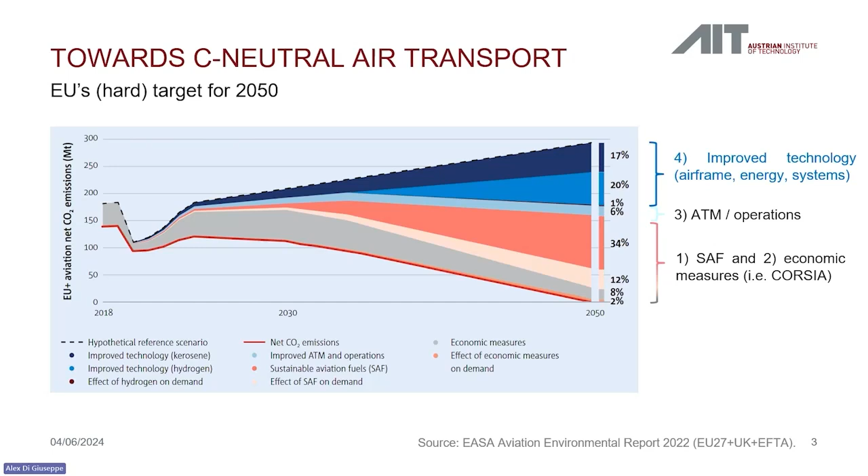What we mostly work on is the remaining part, that is a combination of technologies. So both in terms of airframe, so more efficient, lighter aircraft; energy, so replacing the hydrocarbon fuel with something else; and systems, having more efficient ways of transforming energy within the aircraft.

The EU and the Directorate of Research put forward three strategic thrusts. I'm using their terminology. They developed three platforms on which new aircraft concepts are supposed to be introduced. Actually, 3+1. The short and medium range, that are aircraft for 150 to 200 passengers. If you ever took a Ryanair flight, that's what we're talking about. Hybrid electric regional aircraft, so something smaller that generally accommodates 50 to 100 people, and hydrogen aircraft. Hydrogen aircraft, I will not go into details, but basically involves using liquid hydrogen for very long distance intercontinental flights, like Boeing 777 or Airbus A340, A350.

I came up with this nice graph on where those concepts are located. Here on the x-axis, you can see what is called hybridization of power. So how much electric power you need to move the aircraft. 100% means only electric motors. On the y-axis, you have hybridization for energy. So how much energy does your aircraft carry? That means as you go up, the more battery you carry.

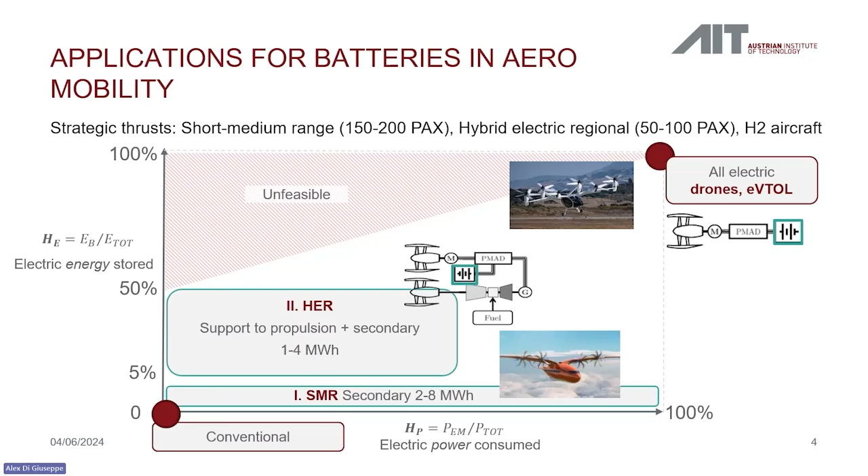The hybrid electric regional aircraft are smaller, so they allow using the energy for support to propulsion. Basically, the battery will be assisting the main propulsion system. And here, smaller size means smaller energy stored. So roughly 1 to 4 megawatt hours, still depending on the size. In the strategic document that you may access, they use the word technobricks. So those are all the technologies that need to be developed in order to make electrified aviation possible.

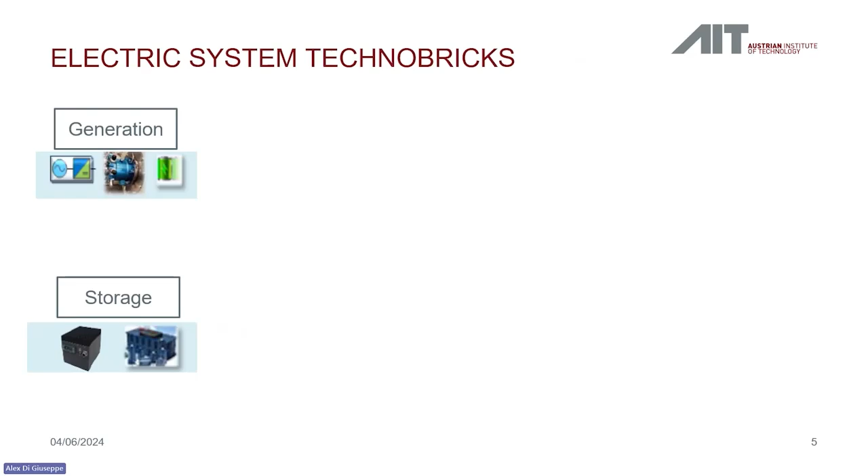Especially referring to the electric system, there are others, of course, that I don't include here. There is the generation and the storage. So generators for more complex systems, fuel cells. We have some speakers here researching fuel cells. So this is a field of application. And of course, batteries for storage.

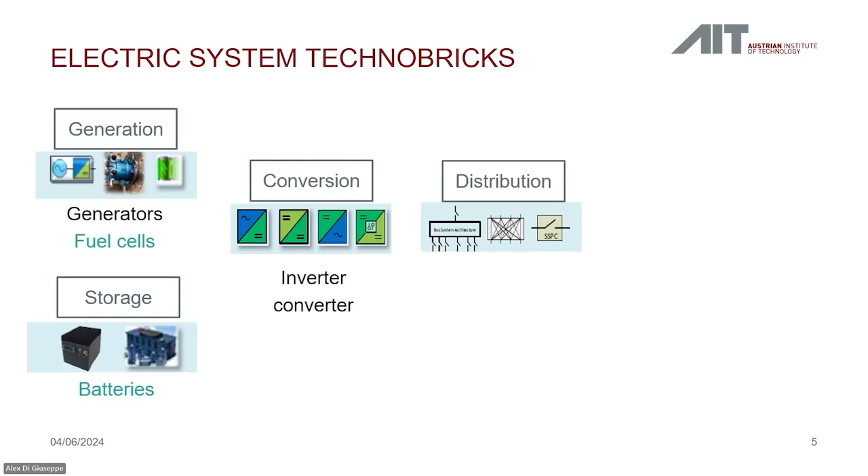Then as we move towards the usage, we have conversion, inverter, converter, distribution, and loads. So APU is basically the starting motor that starts the aircraft. IPS, ice protection system, flap actuators, cabin loads. So whoever wants to watch a movie while flying or wants to charge a mobile, that's a cabin load. And avionics. Currently, we use batteries, that is the main topic we're discussing here, for the last two.

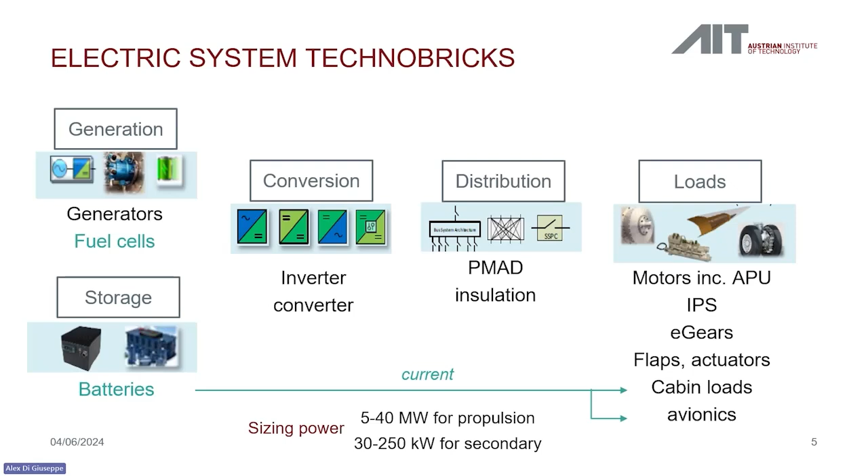Sizing power of this aircraft, just to give you an idea of order of magnitude, is 5 to 40 megawatts for propulsion. Megawatt, 1 megajoule every second. Secondary systems in future aircraft, of course, much smaller, 30 to 250 kilowatts, but still significant compared to today's standards. For energy storage, the clean aviation strategy considers both fuel cells and batteries. They are not mutually exclusive, and cannot be seen separately one from the other because they have different characteristics and they hybridize fairly well.

So fuel cells have the advantage compared to large battery systems of being lighter. Battery systems, if you look at some preliminary calculations, we are talking about batteries that weigh 5,000 kilograms on an aircraft. That means 20–30% of the takeoff weight. They are lighter storage because they rely on hydrogen instead of, say, lithium-ion cells, and cope fairly well with other aircraft subsystems. On the other side, batteries are more efficient, and they have much less problem in terms of thermal management compared to a fuel cell. If you think about that, 50% efficiency of a fuel cell means that the other 50% becomes heat, and you need to dissipate that heat during flight.

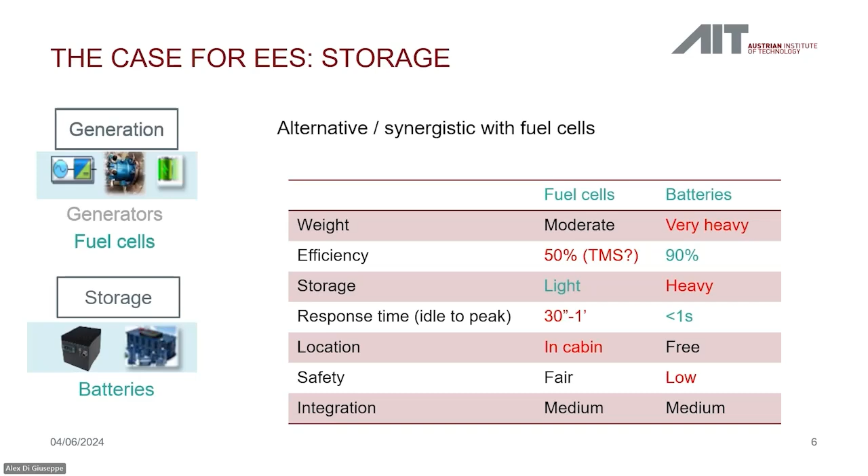And response time: batteries are not supercapacitors, but they are reasonably fast in response, for example, to a sudden power surge required. For example, if there is a missed approach, the aircraft needs to get full power immediately in order not to crash. Fuel cells here are much slower. They need time to build up their power delivery.

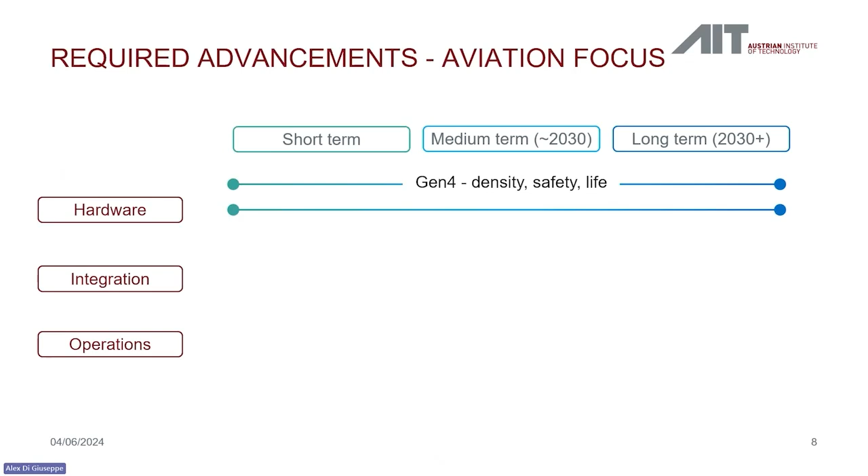So trends for battery research. Okay, this didn't go as intended. This is still a programmatic document that Stefano and Roberto may have contributed to writing, I guess, and identifies short-term, medium-term, and long-term goals. And we have areas related to aviation hardware, integration, and operation where we want to work.

So when it comes to hardware, so basically the cells, we want to have the new generation of battery that we will see later, what we call the generation 4 battery, the solid state, to use a more common word, which promises better energy density, better power density, better safety, and hopefully, unfortunately still not verified, longer lifetime than today's. Lightweight modules and packs, thanks to techniques involving additive manufacturing, for example. And for the long-term perspective, generation 5 cells, so advanced lithium, post-lithium batteries, still with the same target.

When it comes to integration, the advanced integration mostly refers to sensors and the management system of the battery. So you want to know what happens in all your 1,000 battery cells and make sure that all of the cells are behaving properly. And if something happens, that you have a safe way of, for example, excluding that cell. This is a huge step to take in order to get certification, which is extremely hard for batteries.

And since we're talking about certification, one of the things that is particularly challenging is that today there is no standard for certification of electric aircraft. It literally needs to be written, meaning to be invented. Probably some of you in future will be involved with this. And it's a quite active, I don't know if you call it a research field, but anyway, it's a field that still requires strong contribution and will require even more in the next, let's say, 10 to 15 years.

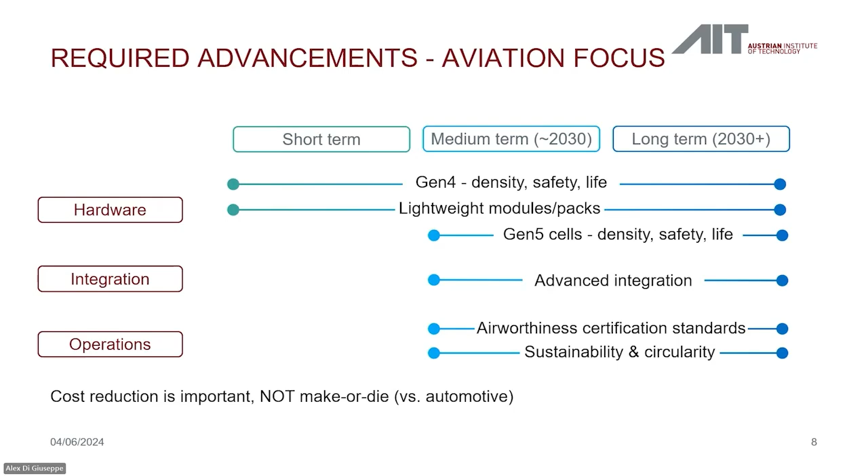cost is a priority. Or if someone is involved or will be involved in marine applications, so batteries for ships, what they want: low cost. After that, low cost. After that, long life. After that, low cost.

There are also some transversal requirements that are set in the policies. So capability of fast charging, I will explain later why. Providing high power and low degradation at the same time, of course, for life. Creating standards for control and interfaces between the battery system and power management and distribution or other aircraft systems. Cross-compatibility, that means that you want to use different kinds of battery without repurposing everything else.

Develop battery swap technology. Batteries for aviation are not going to last 100,000 cycles. Reasonably it will be 5,000 cycles, but this is very optimistic, most likely 2,000-3,000 cycles. So batteries need to be swapped and removed. There is also an idea of swapping batteries in between one flight and the other. This requires developing connection mechanics, so the physical way of removing the battery, the devices, the operations,

electronics and battery management systems for different chemistries, and developing all the infrastructure and logistics of battery swap, including second life application. For example, a battery that is considered no longer useful for aerospace may go into stationary storage, grid storage, or may be used for naval applications.

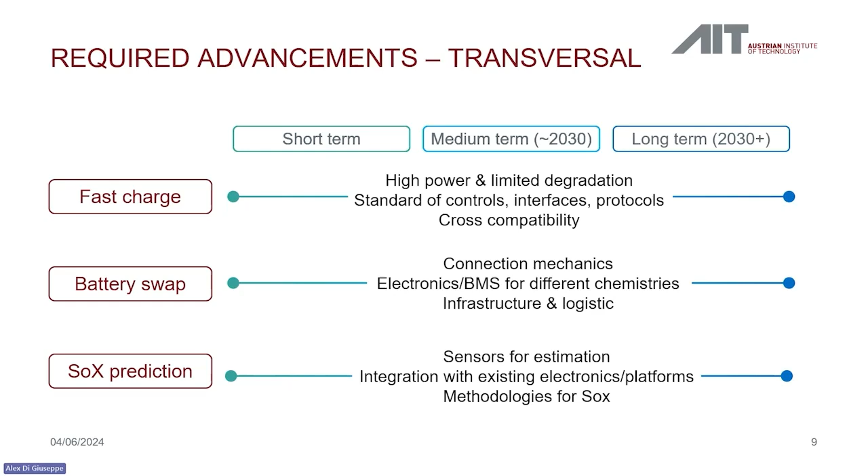And then SOX, which a few years ago was state of health, and now is state of everything: state of health, state of functionality, everything involving the knowledge of the properties of a battery. So what is the useful remaining life, if the battery degraded, if there is a leakage of chemical elements, if there is dendrite formation that may create safety issues, and so on.

So where are we now? Batteries, as I said before, basically function as support of secondary systems. Auxiliary power unit starts. The biggest battery today in aviation is roughly 1 megavolt ampere, 1 megawatt, and it powers the APU of the Boeing 787, the big one.

Batteries are efficient today, at least compared to other aircraft systems. 90% for a battery, I think everyone can agree on that. The best gas turbine makes 40% maybe, when in good condition. Other systems even less. Diesel car, 35%. Flexibility, because they can be easily scaled. What today is not acceptable for aerospace is the weight and the safety.

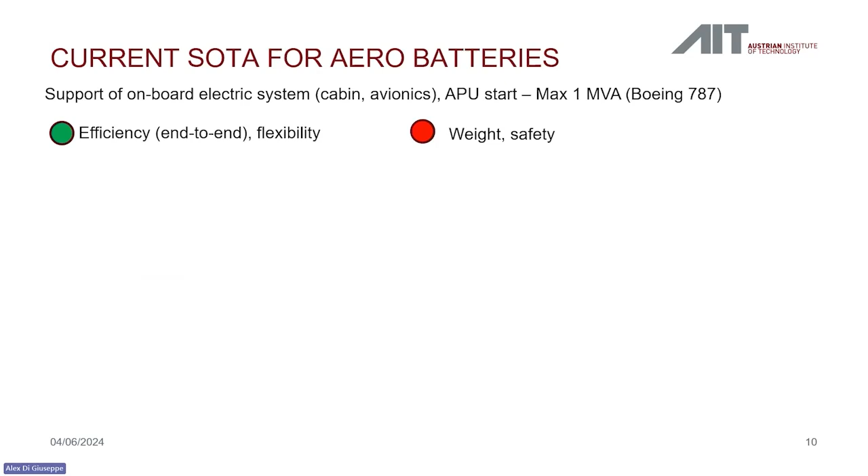We have liquid electrolytes, which are flammable, and that's a huge risk. If you remember, a few years ago, there was a problem with the batteries of some electronic devices that caught fire in aircraft. Now just imagine if it's a battery that is 3,000 times bigger that catches fire, see what happens. And integration with other aircraft systems.

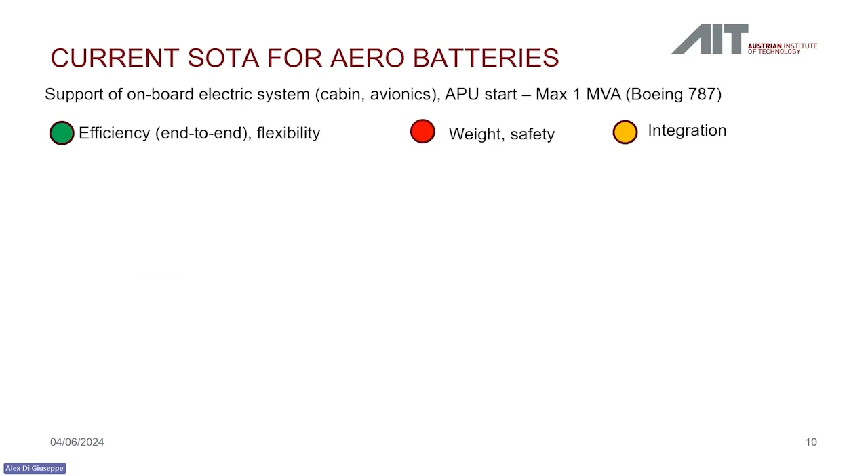The current generation, for those who are not familiar with this, is labeled generation 2B: batteries whose cells have NMC as a cathode and a silicon-carbon anode, basically a carbon anode with a very small content of silicon, and liquid electrolyte. Those cells are the standard for the automotive industry, and their development has been driven by the automotive industry. For example, take Tesla or the Chinese car manufacturers that are launching into the market now. They are here.

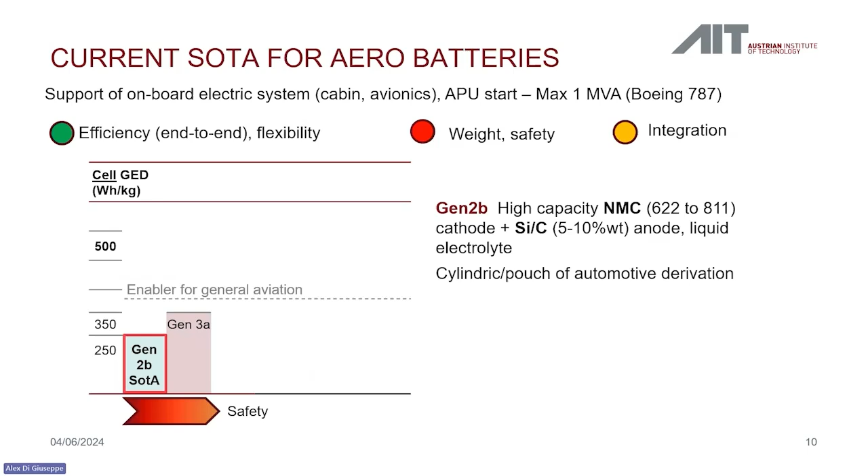They are approaching generation 3A, which is basically an improvement of generation 2 batteries. There is not a significant difference. The only thing is that we go towards more energy dense anodes and cathodes. So we increase the amount of nickel at the cathode, while the anode sees an increase in silicon content, on which some colleagues of yours are working. This is mostly to increase the energy density of the battery, to make them perform better.

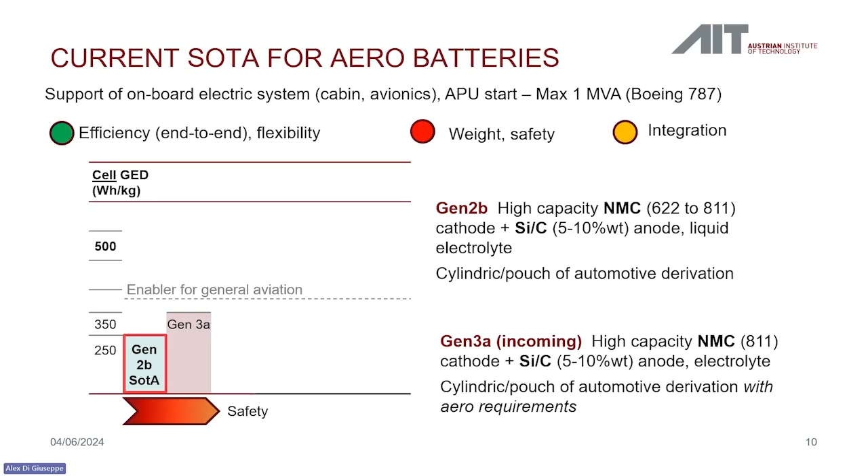I use the cell energy density because this is the main metric that you will see in aerospace. Basically, energy per unit of weight. Light, light, light, or energetic, energetic, energetic. Other things count much less. As I say here, there is a gap. So far, cells have been driven by automotive requirements. Now, automotive cells reach performance that is fairly decent for common use. As you see, electric vehicles are booming.

Therefore, the cells for the automotive industry started focusing on things that are relevant for the automotive industry: reduction of cost, improvement of the manufacturing processes, increase of cycle life. And here there is a divide. Aerospace needs to start building their own cell type, their own manufacturing processes, their own techniques for parameter estimation.

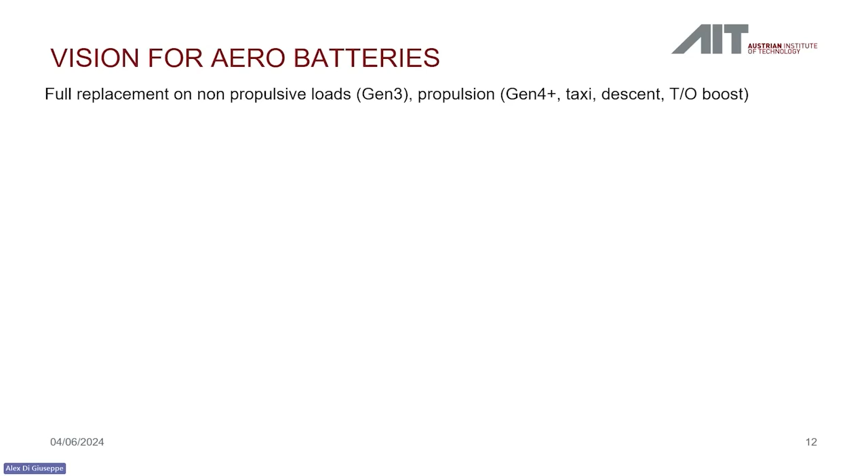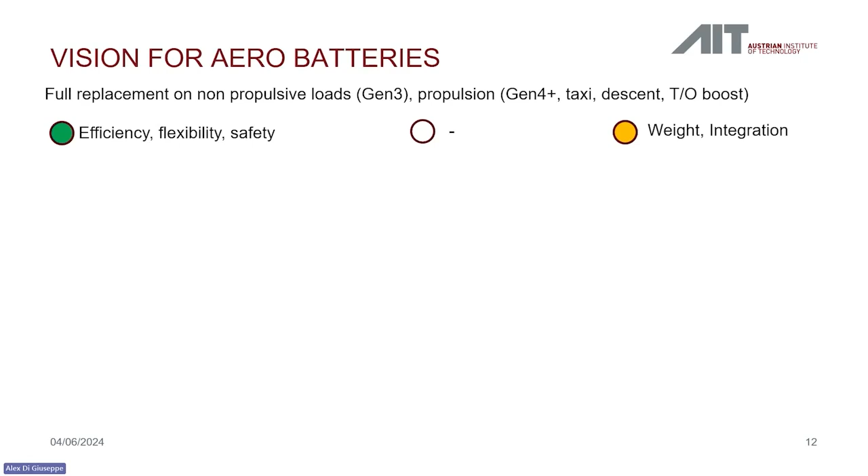Now, again, the vision for aero batteries is that the new generation of batteries will still be efficient, flexible, and safe, thanks mostly to the replacement of the electrolyte. The weight will not be a showstopper, but will still be a limiting factor, but manageable. And this leads to new generations of battery. So the 3B, that is basically a continuation of generation 3. They are considered an enabler for air taxis, so electric vertical takeoff and landing aircraft, and commuter aircraft, so very small aircraft.

Generation 4, basically known as solid-state batteries, where, as I say, they replace the liquid electrolyte with a solid or hybrid with ionic liquid compounds. This is not flammable, and this is important because it basically means that it cannot catch fire. And it's a huge improvement in terms of safety. And it is thought to be an enabler for hybrid electric aircraft at different scales.

Fifth, lithium sulfur or lithium air batteries. This is still too early in the development. We are here at TRL, I guess, no more than 3. And they are considered a long-term solution and definitely will not be seen operating before 2050. That is basically our most important time frame.

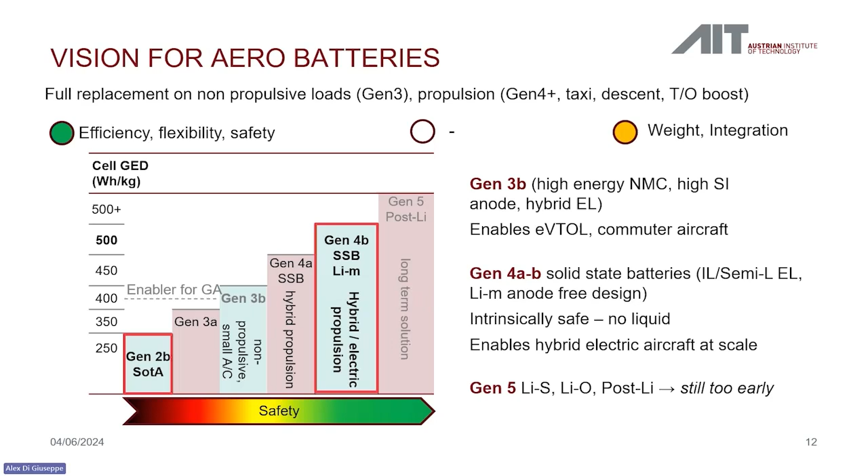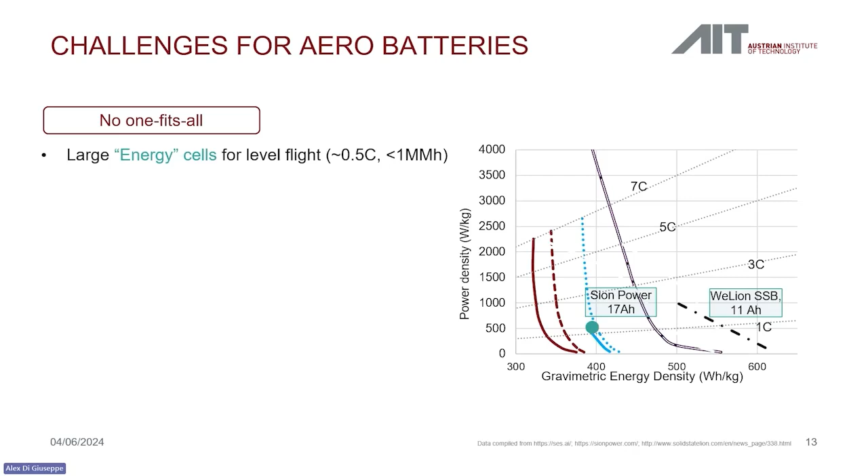So these are basically some of the most state-of-the-art batteries that are available and produced. So this is not research, this is a product under production, from the energy and from the power cell. I explained before the C-rate capabilities, what it is. Drones are a more power-intensive application than energy-intensive application.

And of course, cycle life is not seen in this graph, but of course, batteries need to ensure 2,000 to 5,000 useful cycles without fading. And this is one of the areas that people are working on. For example, solid state today lasts a few hundred cycles, but there are ideas and solutions to increase this number. This is the target that is considered acceptable.

The good thing is that the market is very active. So new prototypes come out literally every year. This graph is from 1 year, 2 years ago. In a couple of years, they will be outdated. There are companies that are producing innovative cells, state-of-the-art cells, at scale in gigafactories, and the new cells, let's say generation 3 cells, are expected to reach a production of gigawatt hours globally in no more than, hopefully, 3 years.

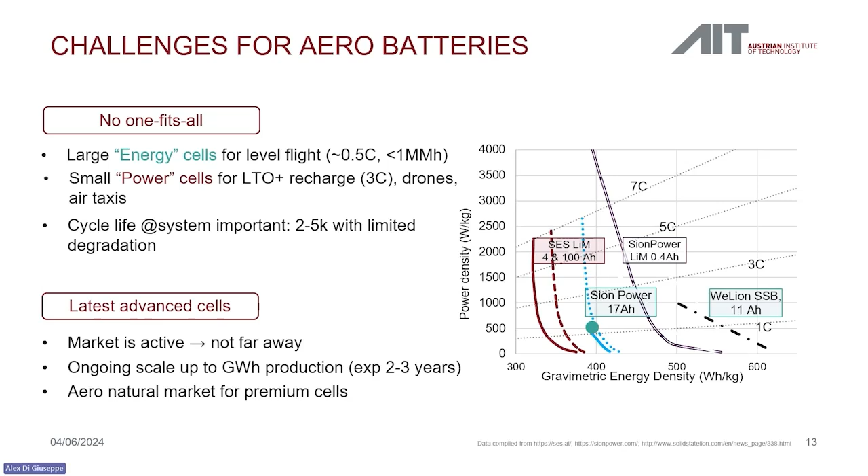Again, this is not the biggest market. The automotive drives, but the aerospace market is emerging as an interesting niche for premium cells. Why? Because of cost. Roughly, to give you an idea of magnitude, aerospace applications are okay with accepting a cost at cell level 5 times, maybe even 10 times the automotive. They literally are worth their weight in gold, almost.

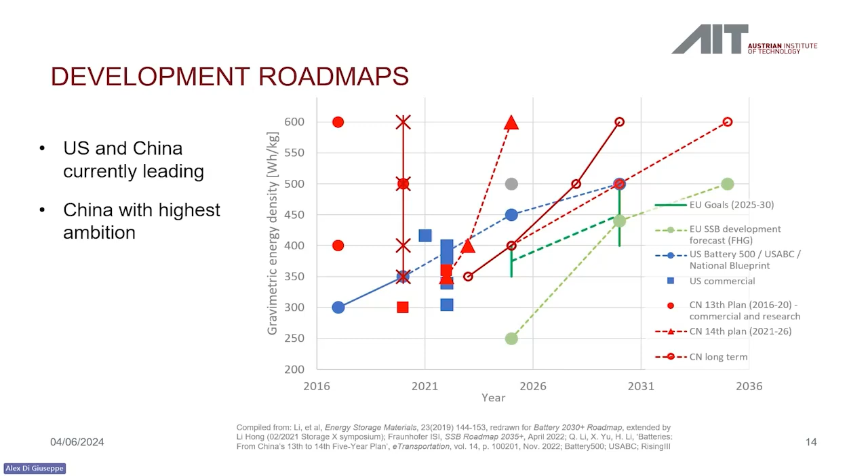They are able to reach 500 watt-hours per kilogram now, although at a low current, it must be said. And I don't know for how many cycles, but there is basically no doubt in the scientific community that they will become the standard. So what we need, Europe: people like you, European researchers, because there is a gap here, and Europe, if it wants to maintain a strategic leadership at the forefront of technology, cannot be left behind.

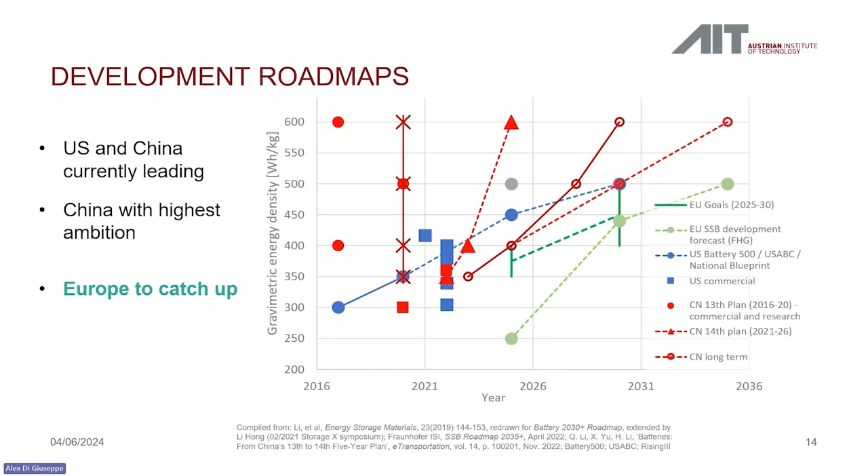For example, think about the electric insulation. Here we're talking about kilovolts and kiloamperes at the same time, in things that go in the air, where the air density is much lower, so it's much easier to have electric arcing.

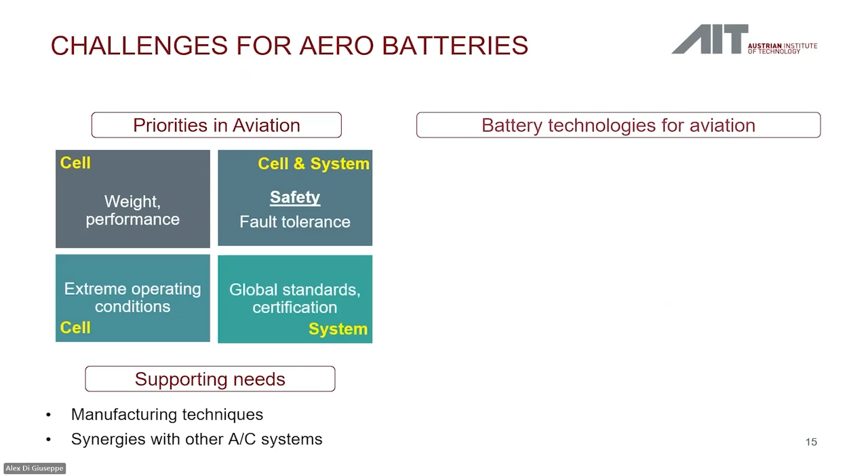So what do we do about that? I will need the help of the people in front. Here at AIT, we are basically taking on battery research for aviation, either by developing innovative cells, so Gen 3 and Gen 4 cells, in terms of pure electrochemistry, where people work in the lab to synthesize materials, test cells, destroy cells, that is very funny. And what I do is develop numerical tools for aeronautics. So basically computer simulation; we exchange data with the experimental people.

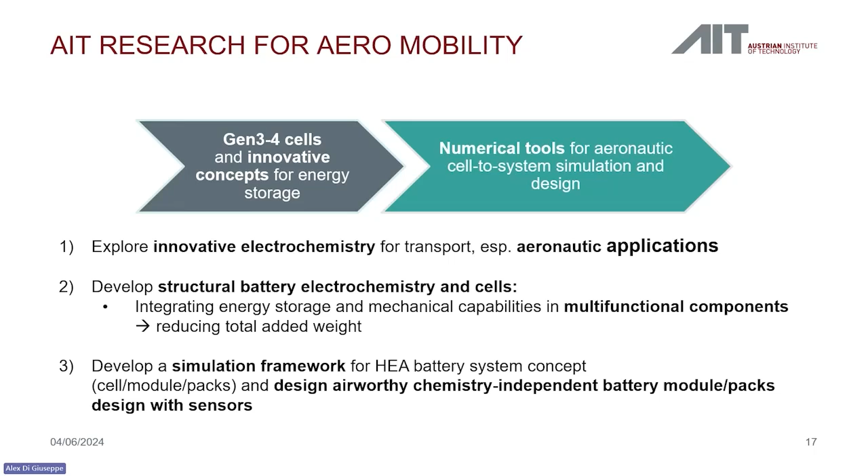Of course, one of the research trends, I will not spend that much time on it because it's not my specialty, and you have colleagues working on solid-state batteries you can ask for all the details. Still, here it is not clear what the solution will be. There are several materials as candidates for the electrolyte. Each of them has pros and cons. The optimal balance needs to be found and cells need to be tuned. This will happen in the next years. Most likely the composite electrolyte may be a way forward, but honestly, I don't know. This may really change if some materials are found.

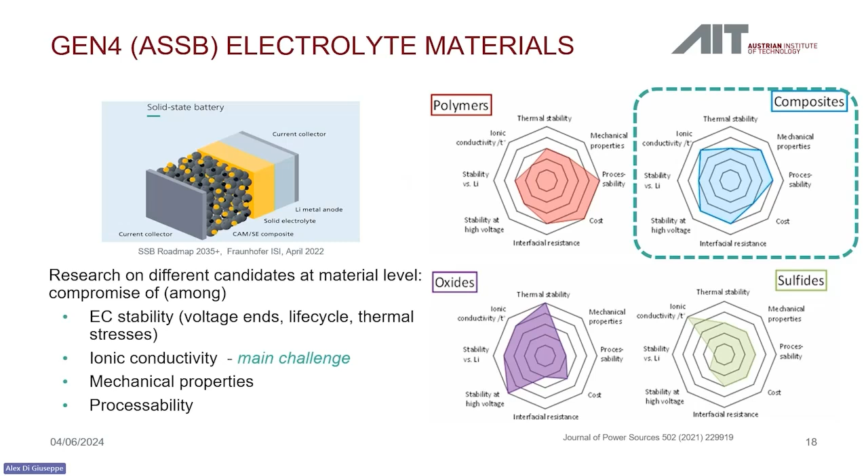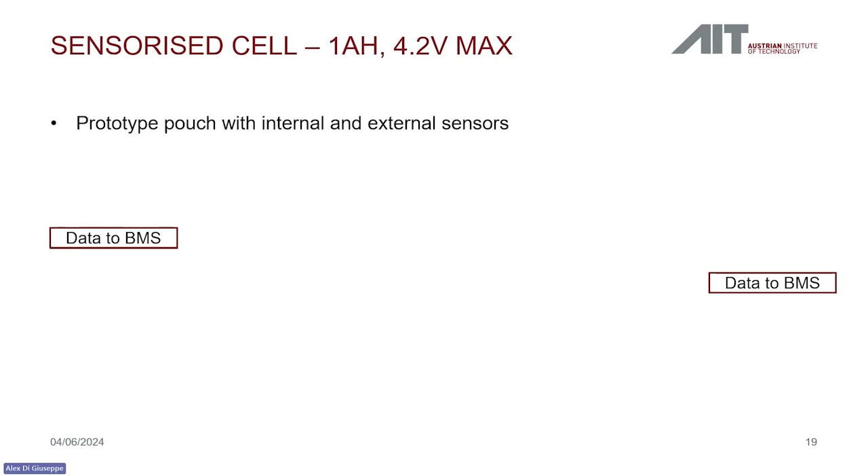Oops. This is the first sample that I brought you. You can circulate it. When I mentioned before integration, I'll just let this thing appear. So this is a prototype Gen 3 cell, if you can circulate it. This is developed for an automotive project, but the concept remains true also for aerospace application.

So the idea here is to integrate sensors in a cell so that the cell is able to control herself in some way. The electronics of the cell receive information from the sensors. So current signal, voltage signal, temperature, strain gauge to measure the deformations, moisture in order to see whether there is some risk for the electrolytes.

This in order to improve our knowledge and the system knowledge of what goes on in a cell, and apply techniques for optimizing, for example, the extraction of energy from certain cells and not from other cells, or to identify the best management strategy of huge battery cell packs.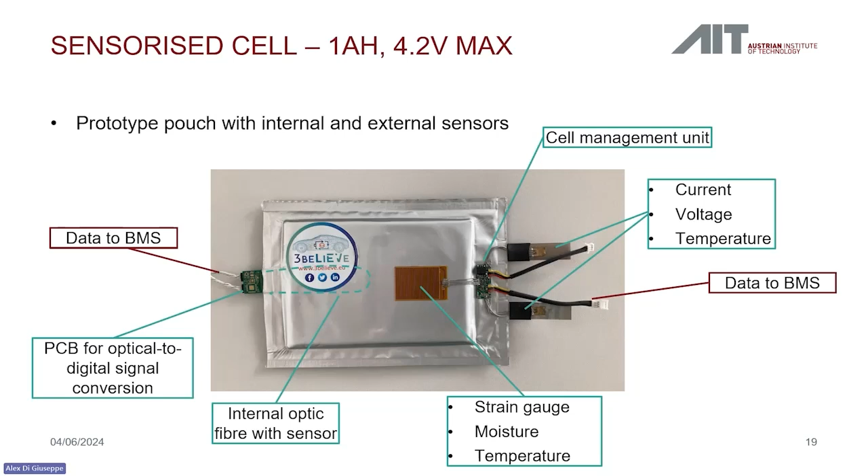An innovative concept for mobility here is what we call structural batteries. So existing cells have a limit. The limit is that the development is reaching the theoretical maximum values achievable, but still the performance is insufficient for our aerospace application. There is a cell-to-pack penalty.

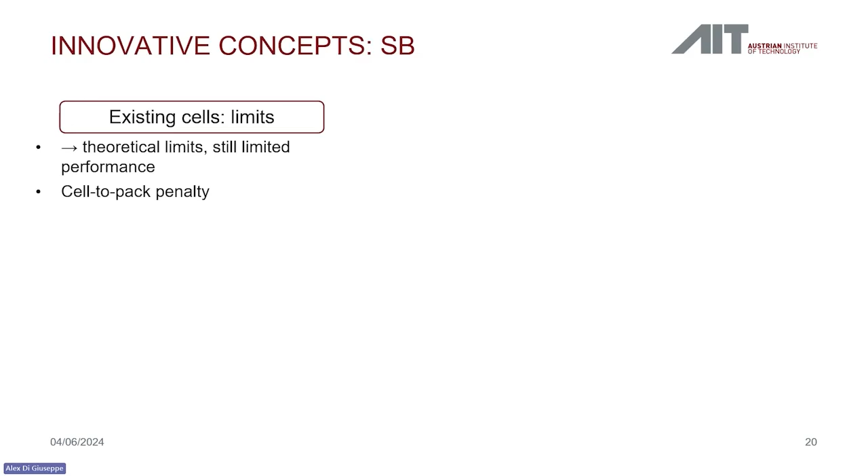The energy density at a cell level is different from the pack level because you have all the metallic frame, you have all the electronics, you have the cooling system, you have the thermal management system, you have the chips, you have the electronic board. From a performance point of view, that's added weight and gives you nothing in advance. So there is low integration. And again, no synergies. Those are cells, period. They don't do anything else.

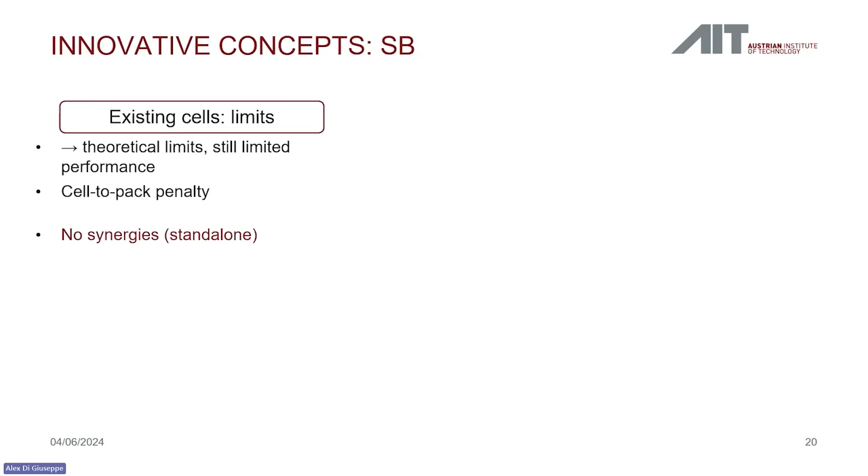So the idea is, why not have cells that do also something else? For example, a cell may both store electric energy and carry some mechanical load. And this goes under the name of structural or multifunctional battery or multifunctional energy storage. This is an idea that first was a source for automotive, but is gaining traction also in aerospace. And we as AIT were hugely invested in this research line.

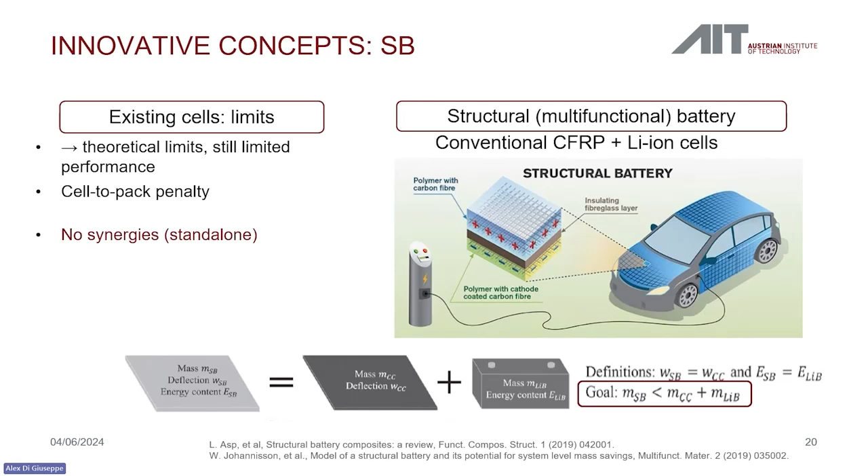So here the idea is to get a system weight level reduction by combining different functionality. It's the same idea of combining batteries and hydrogen for storage. You combine different technology in order to get the best from each of them. There are here 4 levels of multifunctionality. That's not very important, but anyway.

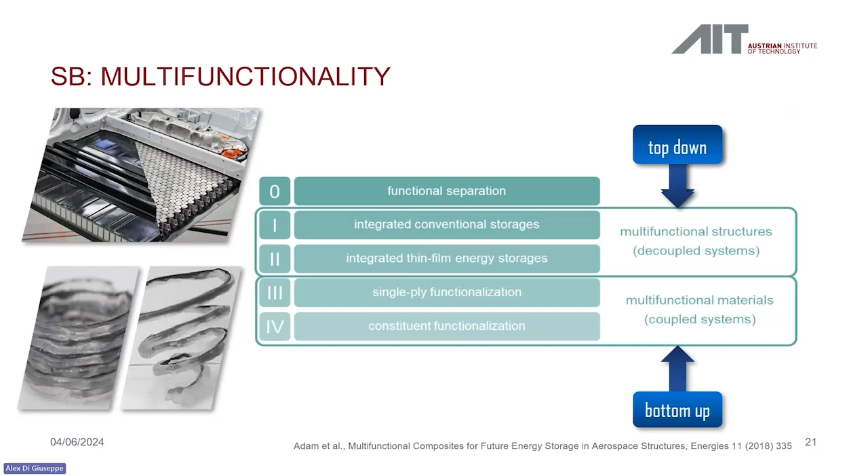For example, you can have level 0, that is what we have today on the top. Basically, a normal battery pack. There are cells here. There is a structure here. They don't communicate. The more you increase their interdependence, the more you move towards full functionalization. And the bottom picture, there are some research samples not produced by us. Look at the reference for the picture, where they have those filaments that store electric energy and are basically based on carbon fibers.

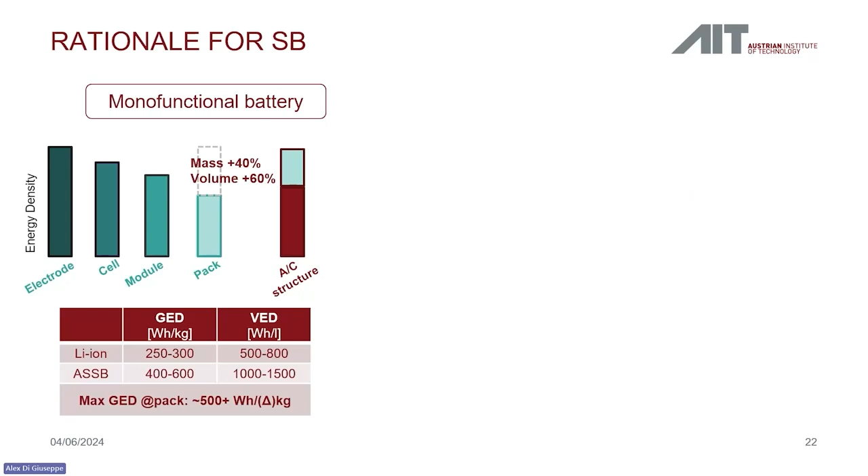The rationale here is that, as you can imagine, there is a weight penalty the more you move from the electrodes towards the pack, that can be quantified as 40% mass and 60% volume penalty when you have your full battery. I will skip here the numbers. Roughly, you can have, at least theoretically, at least from our simulation study, a significant improvement in delta GED. Delta GED is the energy density per delta kilogram, not per kilogram.

That means, in order to make it understandable in an easy way, you start from a panel, composite panel, you remove 1 kilogram, and you replace it with some kind of structural battery. So you removed 1 kilogram of material, you added some other material that also gives you energy storage capability

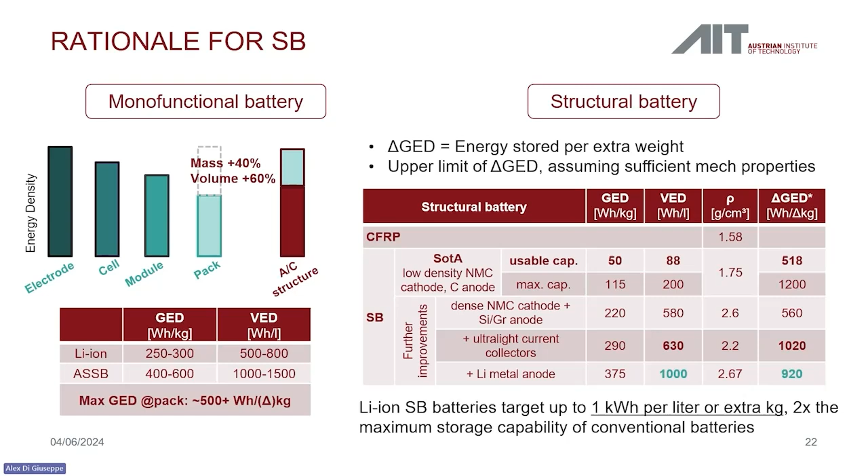that you can measure in watt-hours. So theoretical simulations show that you can get potentially up to 1 kilowatt-hour per liter or per extra kilogram, which is theoretically twice the value of the cells that we consider advanced, let's say the solid state, that roughly have 500, if alone, of course. This just shows you where we are in terms of density.

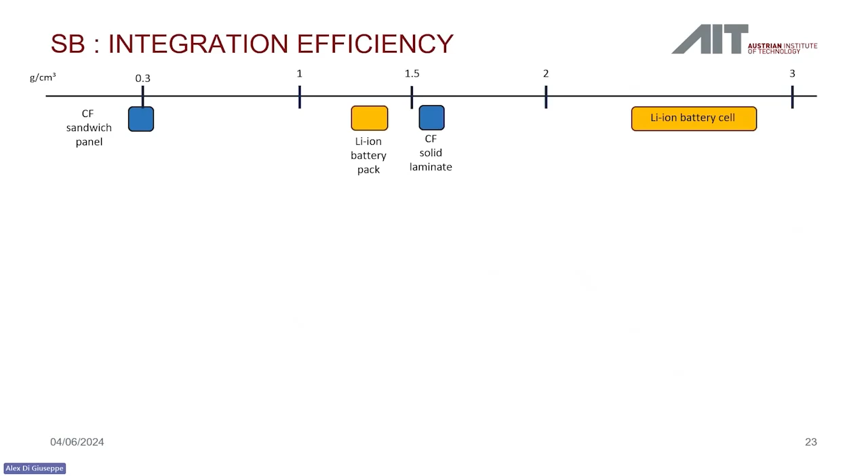As structural material, we generally use carbon fibers. Here, their different levels of integration bring a different value of density. The Solifly cell, I will circulate it in a few minutes, is one of the first prototypes for structural battery that we created.

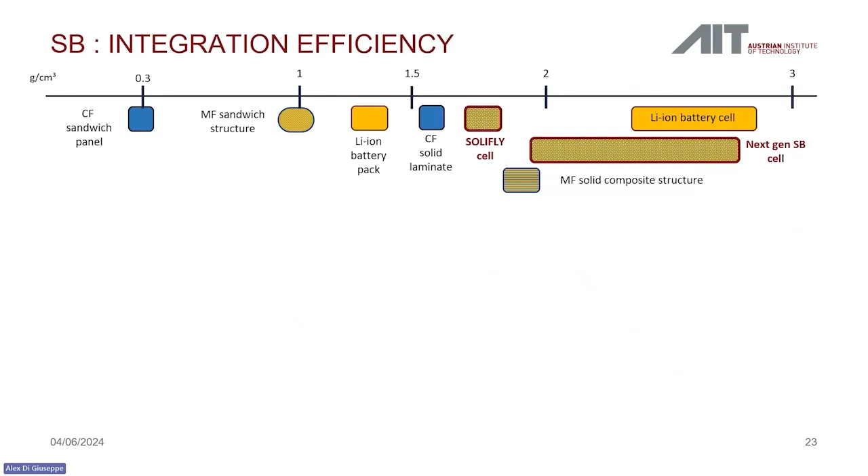Next generation structural battery cells have the potential of going towards higher density simply because they use much more energetic material and they are more structurally integrated. This is the result of some performance level where you can see how things start getting interesting if you are able to reduce the density of structural material to a value that is not too far from the density of the carbon fiber.

So in the chart here to the left, when you go 0.6, 0.7, 0.8, you see how your gain increases exponentially to the level that a structural battery becomes more efficient than having a structure here and a battery here.

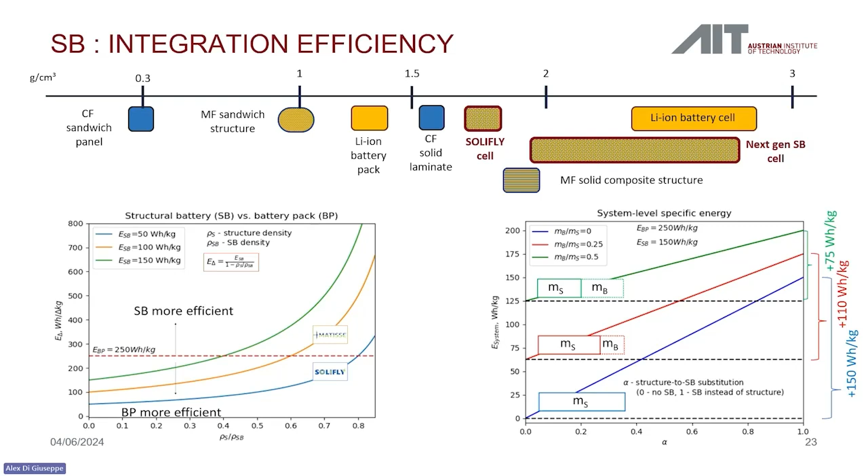These 3 curves basically come from our research projects. They're called Solifly, Matisse, and some hypothetical future project. Solifly is a project that closed 1 or 2 years ago, whose output you will see soon enough. Matisse is an ongoing project that basically expands the purpose of Solifly. Here it comes, the Solifly sample. I'll start it from this side.

Don't worry, there is no charge here. It's gone. Just make sure not to get hurt with the carbon fiber that is delaminating at the bottom.

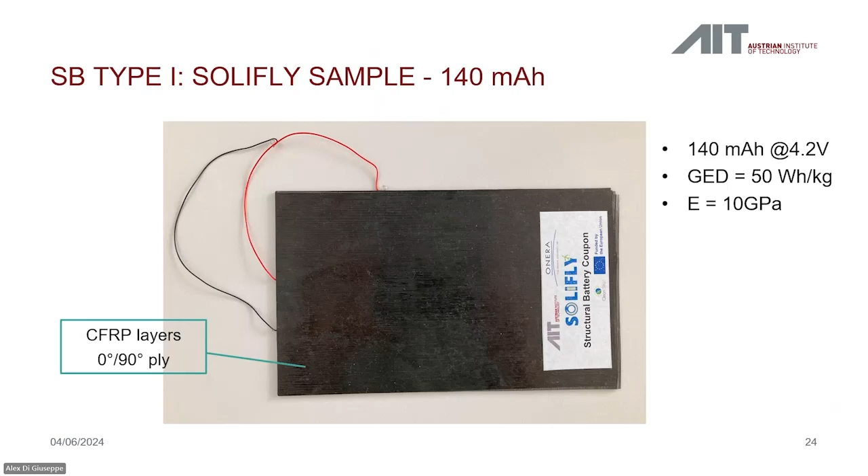So this is the cell. It is capable of, well, was capable, has been tested, of carrying 50 watt-hours per kilogram and has a Young modulus of 10 gigapascal. This, of course, is not mainly for structural application, but for example, may replace some panel in the aircraft. It is basically a series of carbon fiber layers. If you touch the center, you may feel the electrode inside. You may feel the cell inside with 4 layers.

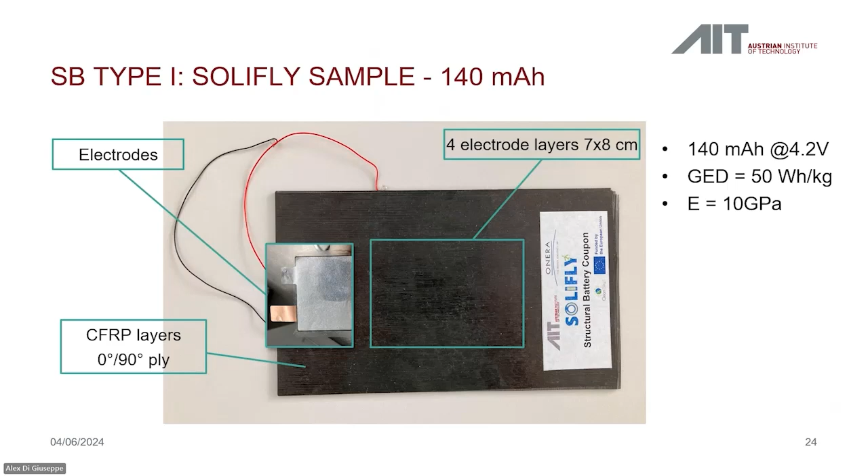This is what is inside if you remove the carbon fiber, please don't. And what's inside here has been tested and is capable of carrying a total load of 120 grams without significant deformation.

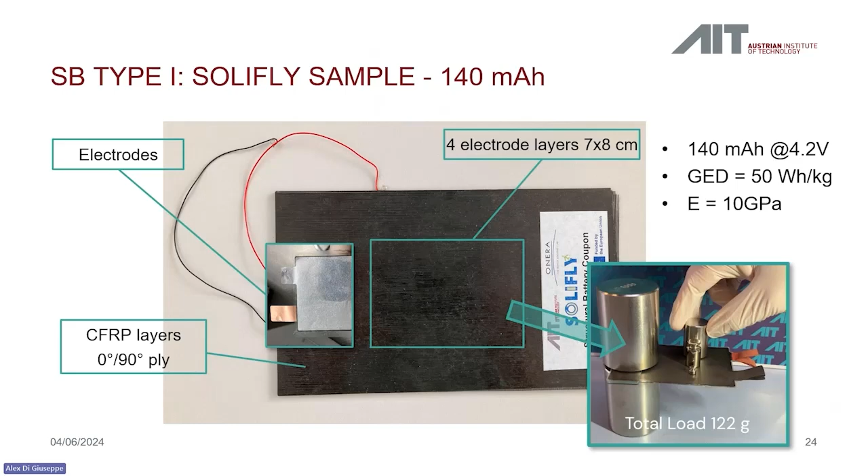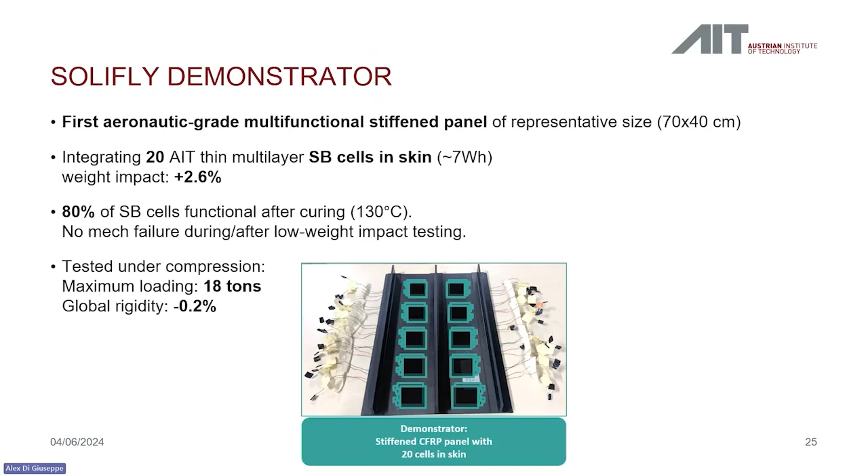This is what happened to the sister of that cell, of that panel there. 20 of them were put together in a module. So we reached a total amount of energy storage of roughly 7 watt-hours, where the cells, good news, resisted curing, because of course you have to manufacture that panel. And they provide energy even after being warmed up to 130 degrees in an oven. The mechanical and thermal tests were realized by our colleagues at ONERA in France.

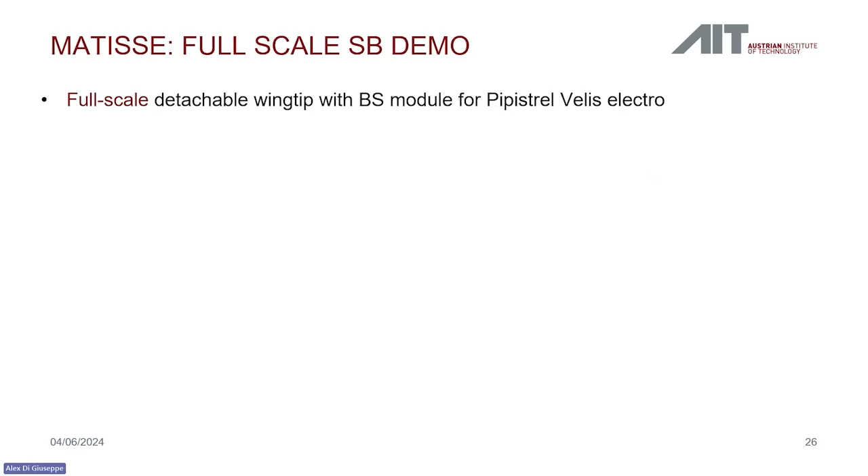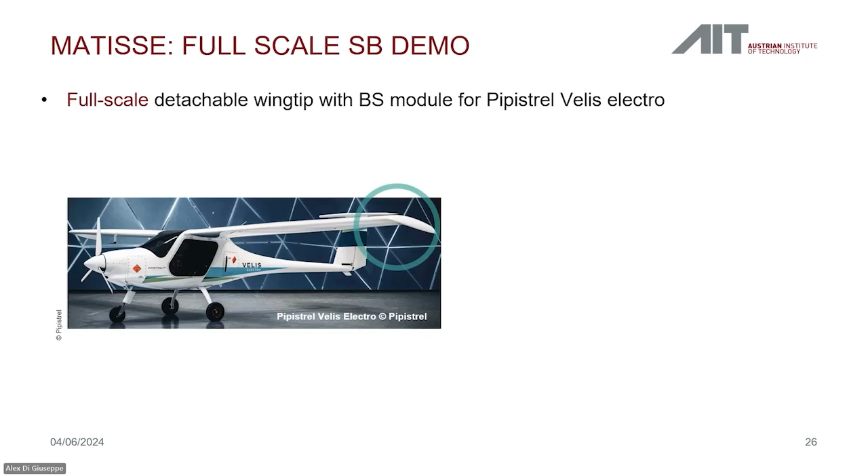The daughter of that panel circulating there is Matisse. With Matisse, we wanted to be more ambitious, and we wanted to go from a single rectangular piece of carbon fiber to a wingtip for the Pipistrel Velis Electro. That is this little beast here that is the first full electric aircraft ever certified. So the module that was created is capable of managing power and delivery, and is capable of self-monitoring the safety of its energy storage component.

And this is what we did. Unfortunately, I don't have the sample with me. It's much larger than that. And my colleagues at the moment have it in Berlin at the ILA. So if anyone has the money to spare for a ticket, they can go and see it.

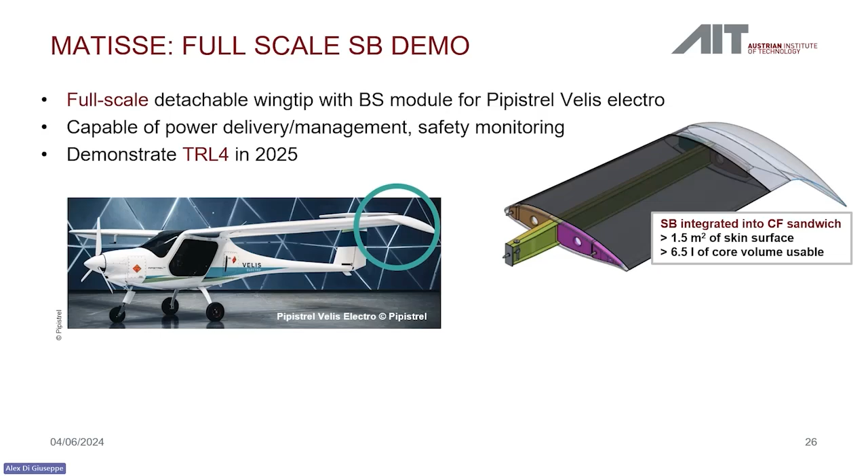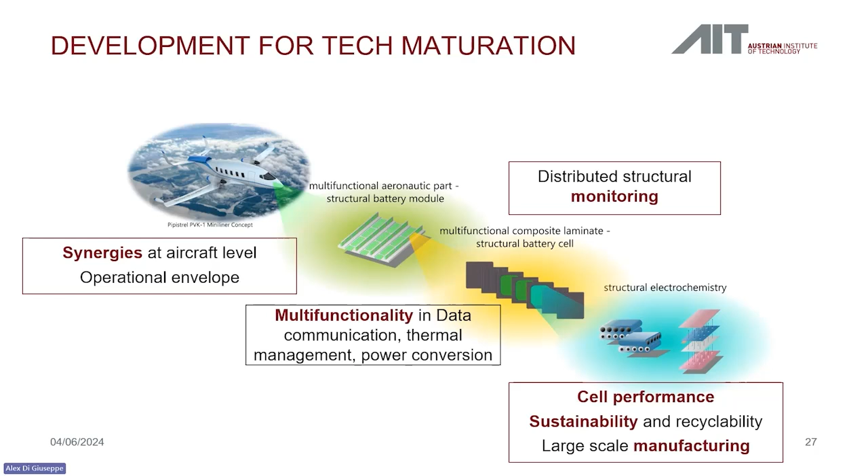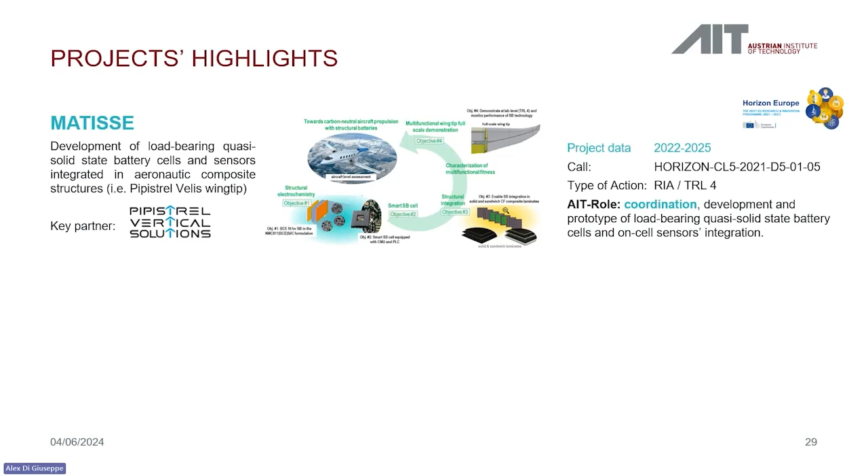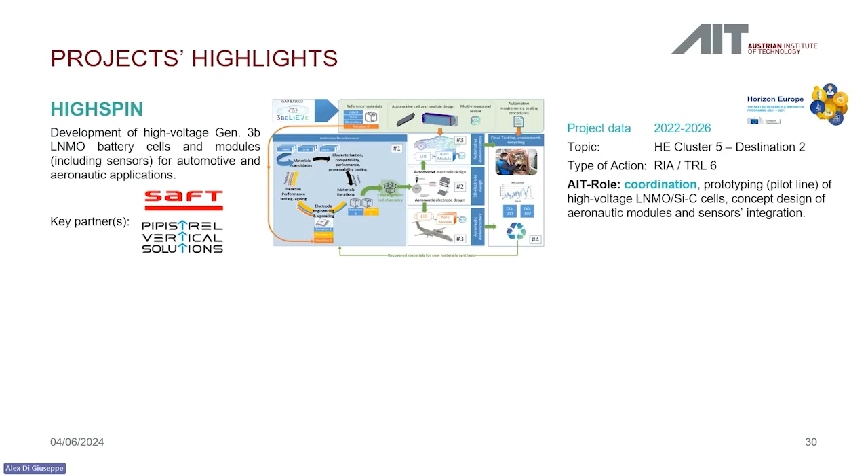Now, basically, these are some project highlights. If you are interested, they will be included in the slides that Pinar has, so you will receive this. These are just some projects that we are involved in, basically battery and development of systems for aviation.